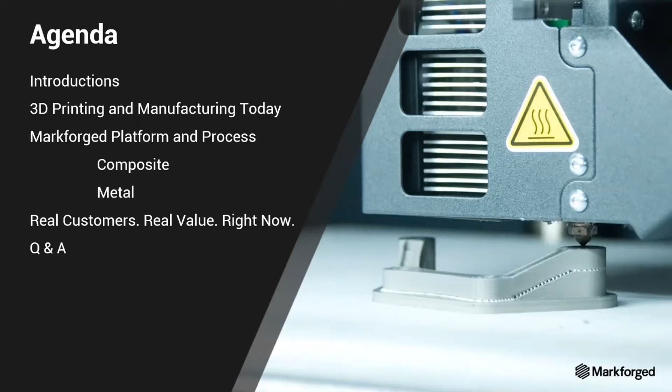But we also carry Markforged because we find that it augments the process of a lot of the machines that we sell and is an excellent additive system to get traditionally subtractive shops into the zone of additive, and it makes a nice transition to that. So the materials that it prints in are very strong, and the parts that it makes are very functional. So it works very well with the other technology that we sell.

So why am I here? I'm here to inform and educate you and give you some ideas on how you might integrate additive into your current process. The goal today is for you to leave this presentation with a better understanding of where additive is today and what you can start looking for in your own workspace that might be augmented by adding some additive to your shop. So let's just jump right in.

3D printing has a broad impact to manufacturing organizations, perhaps more than you're aware of today. I know years ago, 3D printing was more of a novelty. It was something that hobbyists invested in, not manufacturers, although manufacturers may have found marginal uses for the technology. It was not thought of as something that could replace or help a real serious manufacturer in any way. And that's not really the case anymore. Today, we'll explore beyond the tip of the iceberg and share a number of examples where customers are realizing major manufacturing efficiencies and transforming their business with Markforged.

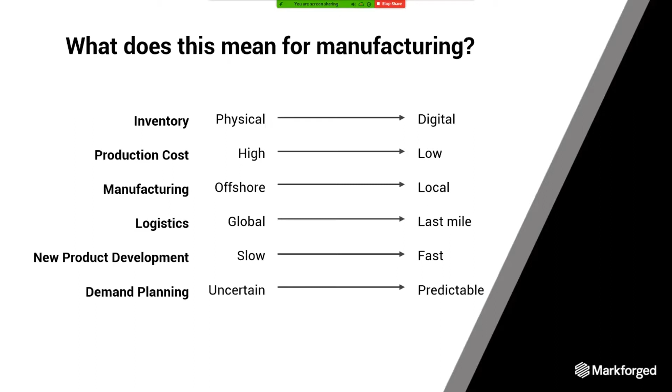And then demand planning, it goes from uncertain to predictable. You can look at what you're being requested to do and use your printer to help you with that. So don't just take our word for it, though.

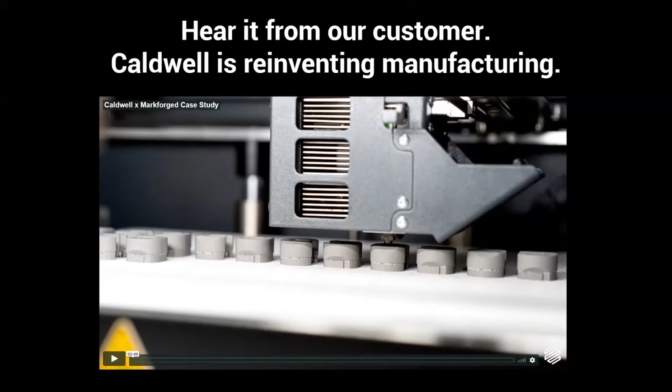I want to show you a video of one of Markforged's customers, Caldwell Engineering. They make window panes and fixtures, and they have integrated both the composite and the metal systems into their process, and it's revolutionized how they manufacture. So I'm going to play this video. It should work, I did test it before.

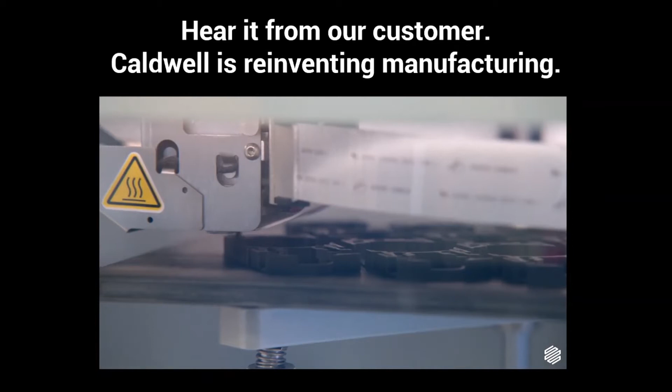At Caldwell, we make components that go into windows and doors that are sold around the world. We've used the Markforged printers to make everything from prototype all the way through low volume production pieces, tools, and fixtures to aid in manufacturing for assembly and/or test and measurement.

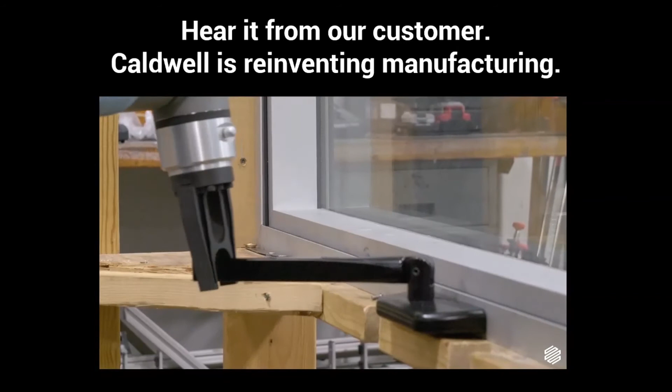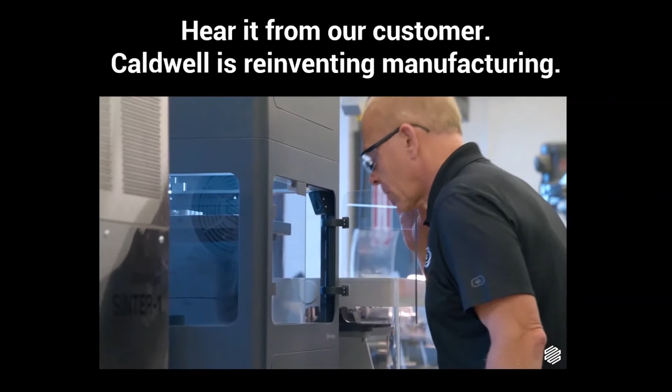In the past, an engineer would need a part made, and I'd have to estimate how long it would take to machine that part. Some of those parts could have 40 hours of machining in them. Today, with the Markforged printers, an engineer will give me a drawing, and the first thing that comes to my mind is I want to use the printers. This fixture to machine traditionally would probably cost 5 times as much and take 2 weeks to manufacture. I printed it in a day, and they were able to use it that same day.

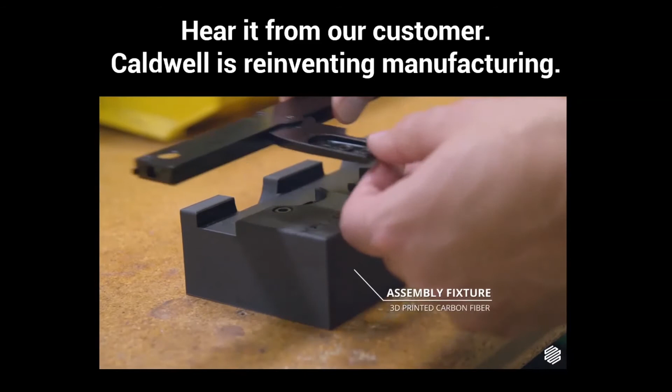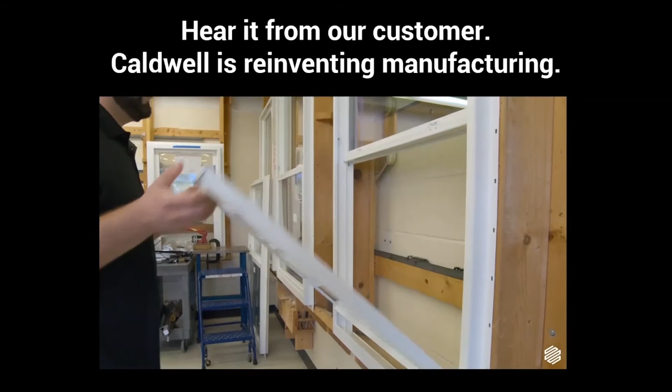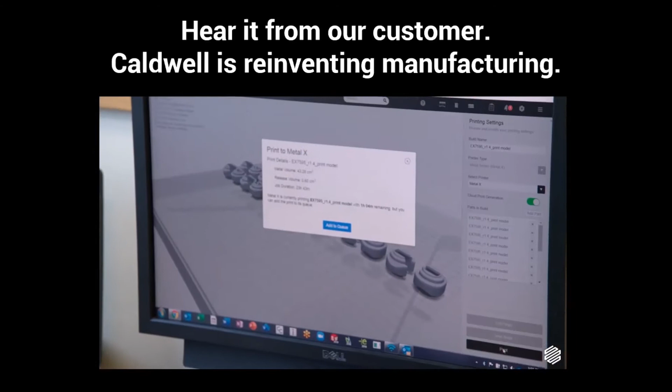This is a production assembly. This is a prototype assembly using both composite and metal 3D printers. This assembly allows you to tilt your windows in for cleaning. Having the ability to 3D print our own metal components has really improved our development process. The similarities between what we'll print in stainless steel and what we would cast in stainless steel is just incredible. That's something we can get in 2 days in our own lab.

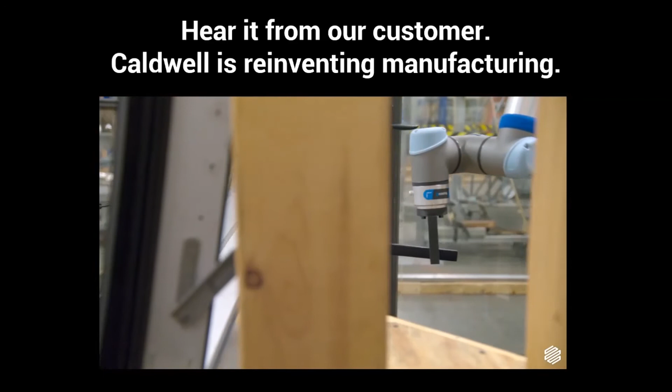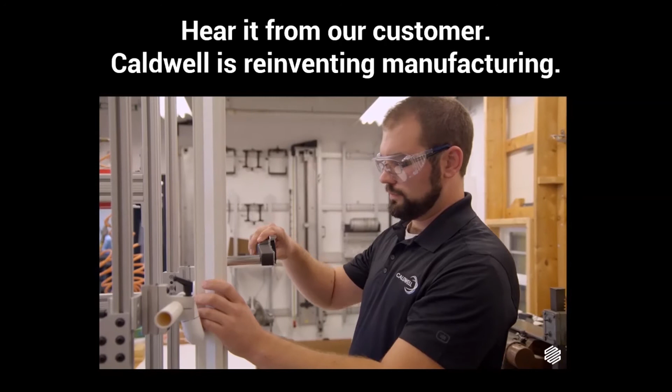The hardware we manufacture is what holds the window together structurally, and if that were to fail, it can mean severe damage to a building and major disruption for someone's life. The strength of the 3D printed parts that we get off the Markforged machines allow us to put those parts through the same set of conditions that we would test a production piece. They're real parts that have actual strength. In this highly competitive world, you need every advantage you can get to produce the parts, do your job, have a leg up on your competition in every single part of the business possible. And 3D printing is huge to help us do that.

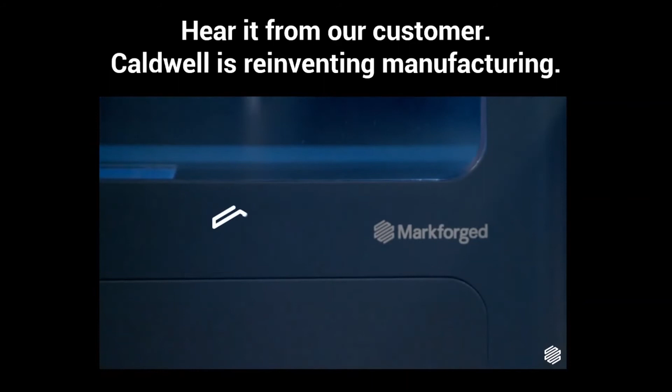Pretty cool, right? So you can see that it's really changed the way they do manufacturing. And we're going to revisit them a little bit later in the use cases section, talk maybe some more about the actual business impacts from a monetary standpoint.

So, okay, we've spoken broadly about where manufacturing is in regards to 3D printing. Now let's speak about Markforged itself. Markforged doesn't just offer a 3D printer, it offers a platform, which means it has competitive materials, a comprehensive portfolio of materials that are all made in-house, strength and accuracy to an industrial level.

So you're not going to be relying on hobbyist printers to do your work. Accessible and easy to use technology that is designed for manufacturers who may not have experience with additive, helps them integrate this technology into their current process with ease. They do a lot to make sure that the integration goes smoothly because they're aware that the technology is new. And that's a complaint with a lot of 3D technologies, that it is difficult to use and rather finicky, and you don't get precise, good results.

So Markforged does everything they can to try to mitigate that. And then as a company, they're also a leader in innovation. They've created multiple printing processes from scratch, and they're also developing software for manufacturing. One software that they're developing is called Blacksmith.

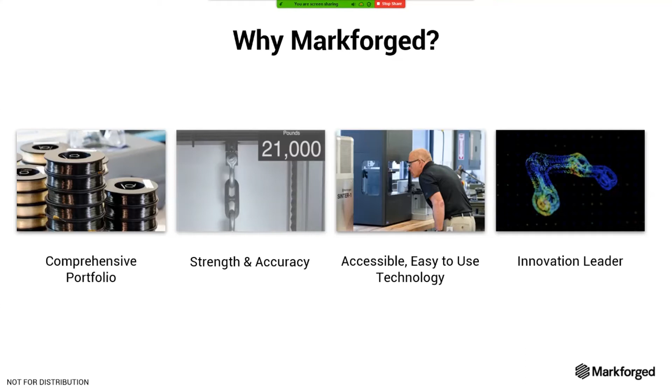If we break it down, the value added from Markforged is high quality hardware that does what it says precisely and accurately, that you can trust. Industrial grade materials made in the USA, designed for industrial applications, chemically resistant, strong, non-marring, that work for what you want your parts to do. And enterprise level software designed to make it easy to print from anywhere and manage users on your printers. The software is continually updated, so it's enterprise grade. It shouldn't be a hassle to work with. That's the goal.

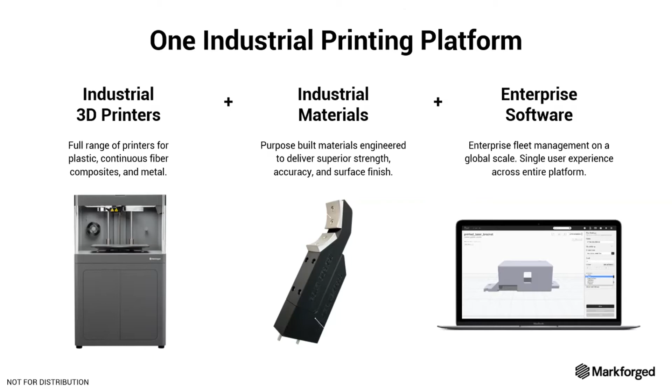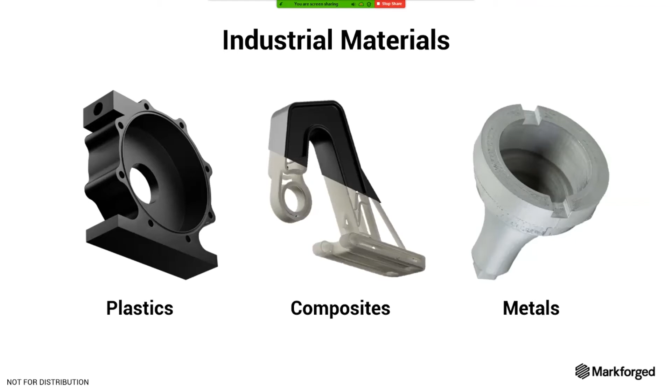Now speaking about the materials, they have a full range that stand up to industrial environments. Strong thermoplastics like Onyx, a nylon 6 carbon fiber blend designed to create great surface finish, strong parts, and chemically resistant parts. Only Markforged has the proven technology to reinforce with continuous fibers, which allows you to print parts that function like metal parts, replacing aluminum parts with ample strength. And then there's also metal printing. All materials are made in-house and are comparable to their machined counterparts.

If we put the technology together, you can do some really special things. This is a gripper arm used to lift a casting into a VMC. The company had to keep a lot of replacement parts on hand in case this machine went down. They switched to the Markforged system and are able to print these parts in a day or two instead of waiting two weeks on lead time, printed specifically for these pieces. There are metal contact points for wear resistance and higher stiffness and strength, and the arm itself is made of composites reinforced with carbon fiber, giving the same strength as the parts they were replacing at a much lower weight and cost. Using both technologies together produces amazing results.

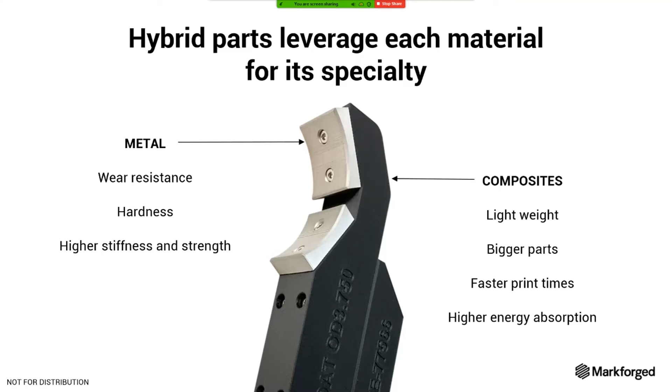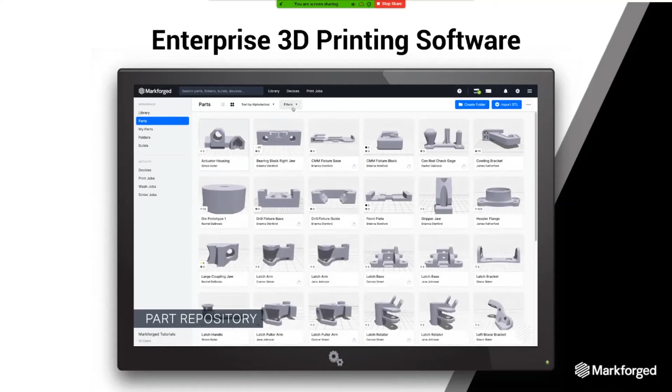Now speaking about the software, I'll let this video play so you can see what it looks like while I speak over it. It offers more than just a slicer - it's also a part repository with fleet management features. All your parts are stored within Eiger and can be accessed from any Google Chrome tab anywhere, even on your phone. It lets you view your parts in 3D and decide where to lay your fiber.

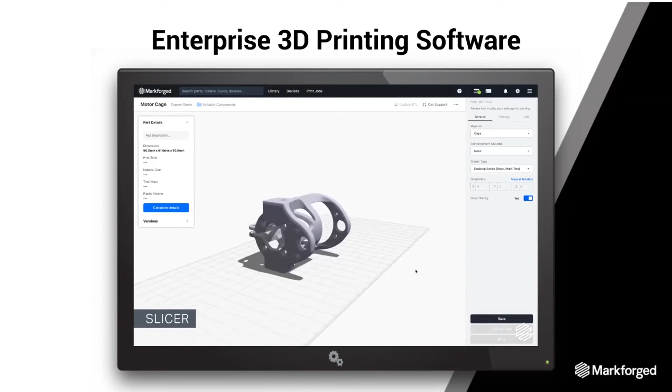It lets you change infills, wall, floor, and roof thickness. There's a lot of customization to your prints, and it's all cloud-based, so you don't have to use your own computer resources to do the slicing. It does it all for you, and you can print from anywhere - you can be at home, and as long as your printer is up, you can tell it to print, and it'll be there when you get in the morning.

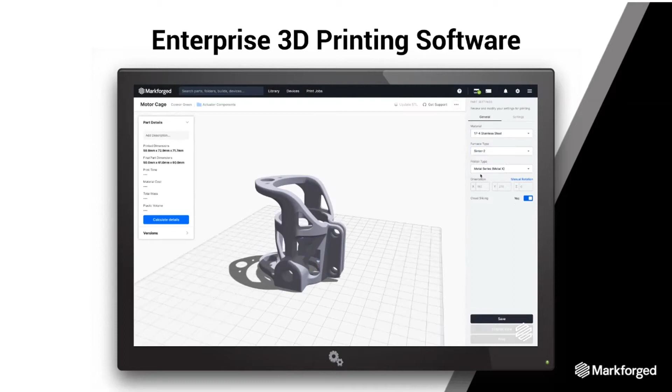The frustration of wonky slicers is sort of a thing of the past with this system, and I can speak from experience - this is a really easy to use software. So those worried about overcoming the software hurdles of doing additive shouldn't be worried. Eiger has you in mind and can fulfill your needs easily.

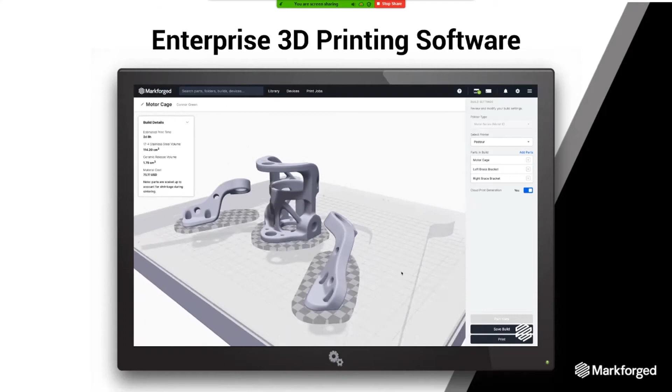So I've spoken about the platform itself. I'm going to dig a little bit deeper into the technologies, first composite, then metal, and talk about what makes them special.

Markforged is unique in that it's the only proven 3D printing technology that can print continuous carbon fiber. This is a complicated concept, so think of it like rebar in concrete. The continuous filament fabrication uses continuous fibers placed in the thermoplastic to deliver unmatched strength, so you can replace metal parts with parts directly off a 3D printer.

What that gives you is strength comparable to metal parts, and durability in a lot of different ways. It's variable depending on which fiber you put into your parts—you're able to change whether it's more impact resistant or lightweight strength. The process is optimized for performance, designed to be lightweight and great for manufacturers.

Breaking down the process, you start with your part in CAD, design it just like you would for machining, and then put it in the slicer. If I haven't explained what the slicer is, think of it like the equivalent of CAM for subtractive machines. CAM does the tool pathing—slicing takes your part, slices it into discrete layers, and paths the head around those layers so the printer can create the piece layer by layer, and then you print it.

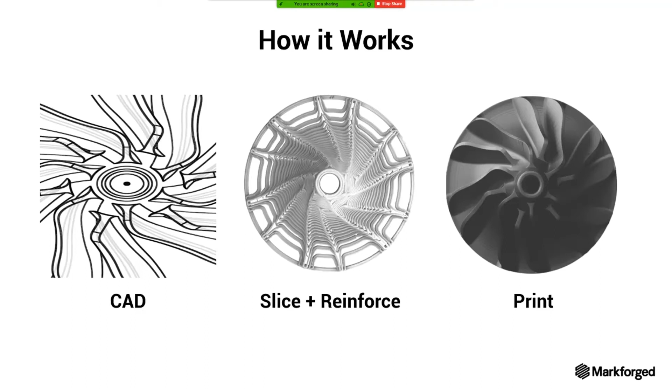In Eiger, you can alter how exactly your piece is made, altering slight attributes of it, including where the fiber is placed. With continuous fiber reinforcement, the part is plastic on the outside, and every other layer—or however you set it—it will print a layer of plastic, then a layer of fiber, then more plastic. So the part is inlaid with strong fiber, giving it a lot more strength than it would otherwise have as just normal plastic. That's what lets these pieces be so strong and good for functional applications.

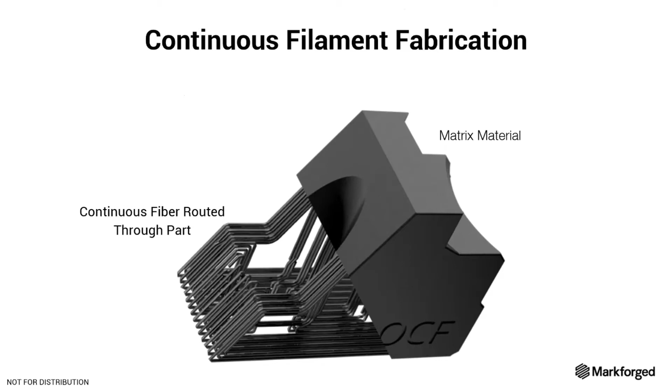Fiberglass is the most cost-effective fiber. Customers usually iterate on their designs with fiberglass and then print with carbon fiber later. Kevlar, like what you'd make a bulletproof vest out of, is highly impact resistant and won't break, and won't deform quite as much as some of the other materials. Lastly, we have high strength, high temperature fiberglass—like fiberglass, but it can endure more strength and raises the heat deflection temperature up to 150 degrees Celsius, about 300 degrees Fahrenheit. When combined with Onyx, you get a part that can withstand applied load at elevated temperatures for prolonged periods of time.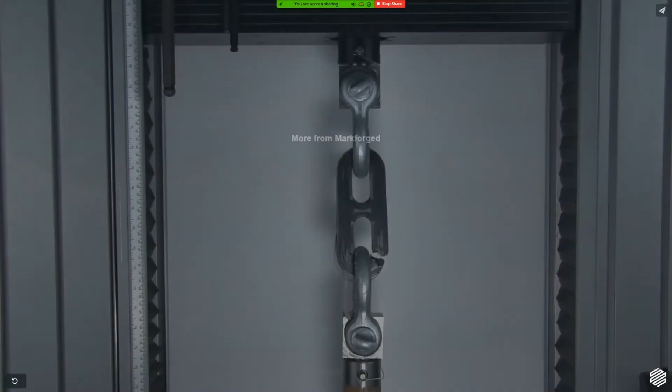So 22,000 pounds—that sounds like a lot. If you don't know how much that is, it's one unloaded cement truck, or six 2009 Ford Tauruses, or 19 grizzly bears, or 1.6 T-Rexes, or 1,500 bowling balls. So, a lot of weight. These are pretty strong parts.

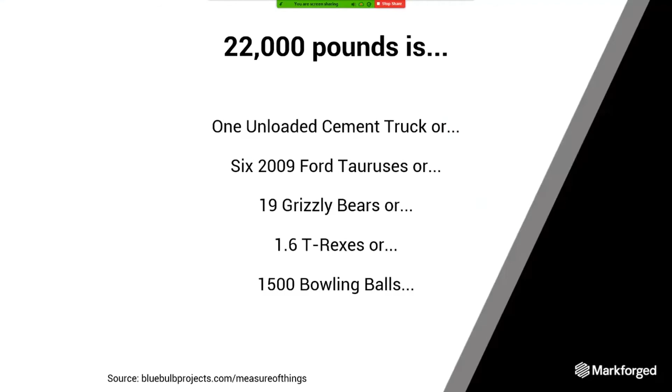All right, so that's enough for composite. Now we're going to move on to metal. I know some of you are interested mainly in that, so this part's for you.

The Metal X 3D printing platform is a safe, cost-effective, and easy-to-use system that dramatically reduces lead time and costs, and maximizes gains across your organization. It's safe, affordable, and easy.

For those of you who have investigated other metal 3D printing methods, you know that traditionally DMLS is the other option, and it is very expensive. Those machines cost upwards of $1 million. They require their own environments and operators, are very hard to change over, very power demanding, and require post-processing to even get the parts off the bed—you have to use an EDM machine to remove the parts from the bed. So although it is an option, it is often cost prohibitive and environmentally prohibitive for most customers.

That's why the Metal X was made. The Metal X is a fraction of the price and can offer similar results to these machines without all the environmental hazards.

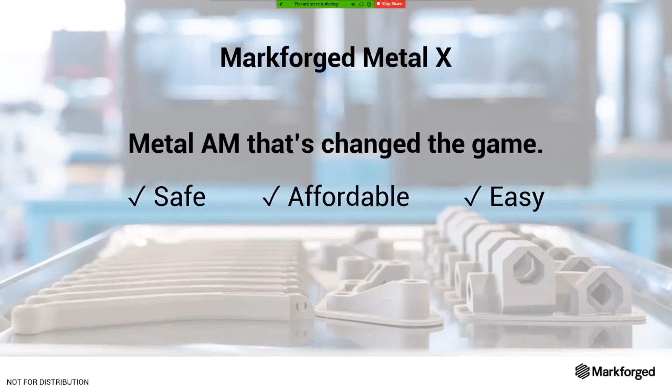Some of the benefits of the metal 3D printing process: no tooling. So if you have a part that you need made out of metal and you're worried about how you're going to position it in the machine, what tools you're going to use, or even the time it's going to take to configure everything, no problems. You simply put your file in Eiger, slice it, and print it.

It doesn't have any pre-setup required, so you have more freedom with the variety of parts you create. It's automated, so although most manufacturing processes require continual human oversight to ensure successful outcomes, this does not. All you have to do is put the piece in, and it prints it. You can print it overnight, come in the next day, and it's finished.

And then geometric freedom. We're constantly aware of the issues that traditional subtractive machines have with where your tools can go and how exactly you're going to create things. Some parts are just impossible to create with traditional subtractive methods. Those barriers are lifted with additive. It allows you more complex geometry and more freedom in your designs because you're not bound by the same constraints as before. This can add a lot of variety to your skill set or to your arsenal in what you can create.

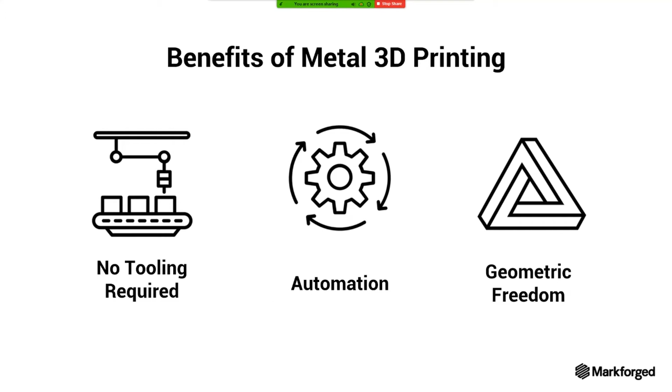So the process looks something like this. You print your piece. Once it's finished printing, it's what we call green. You take the green part and put it into this, what looks like a fryer, but it's the wash station. It uses an industrial degreaser to remove the wax from the parts, leaving them porous. So you have a part that is metal powder bound in plastic with porous holes.

You put it into the sintering oven. For those of you who aren't familiar, a sintering oven uses a combination of heat and pressure to cook parts. It compresses the parts, vaporizing the plastic and compressing all the metal together. So your parts do shrink, but it's uniform and the software compensates for it. You plug your piece into the software, it will compensate for any shrinkage it'll undergo in the sintering process, leaving you with your nominal values at the very end.

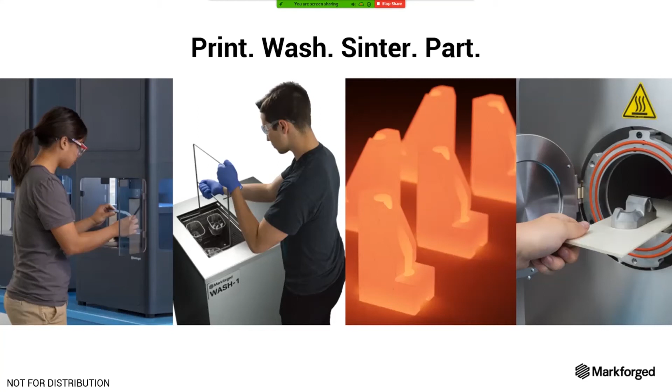Then you remove it from the sinter, and it can go off to any post-processing that you would do on a part made on a CNC machine. It can do heat treating or sanding or anything you might need to do to this part. You should be able to do it. It's not a special metal at that point, it's just what you get out of the billet. So if we want to watch the process itself...

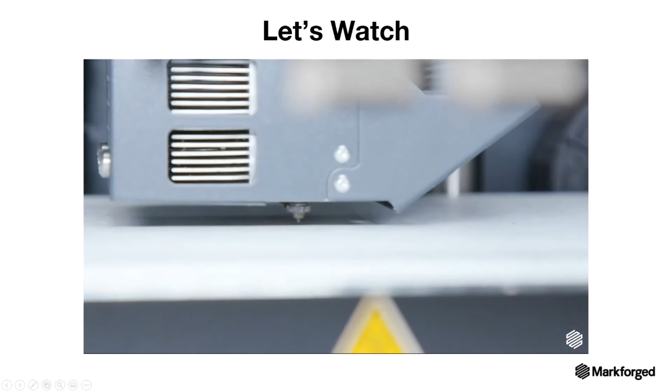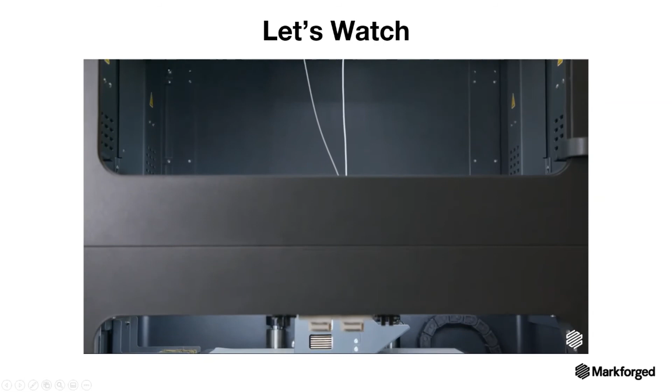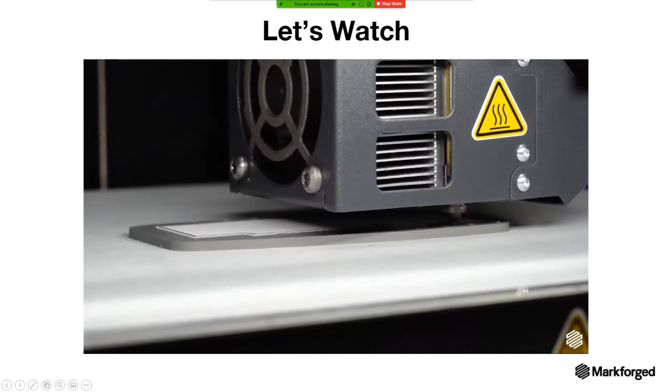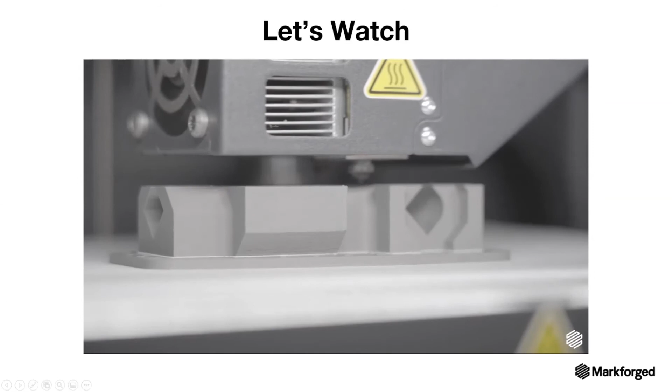Part comes out of the furnace, it's easy to remove. Unlike other metal 3D printing systems, this process does not require loose metal powder, resulting in a safer and more cost-efficient workflow. 17-4 stainless steel is loaded now. However, with a quick changeover, the system is capable of printing in stainless steels, tool steels, coppers, Inconel, along with several other materials currently in development.

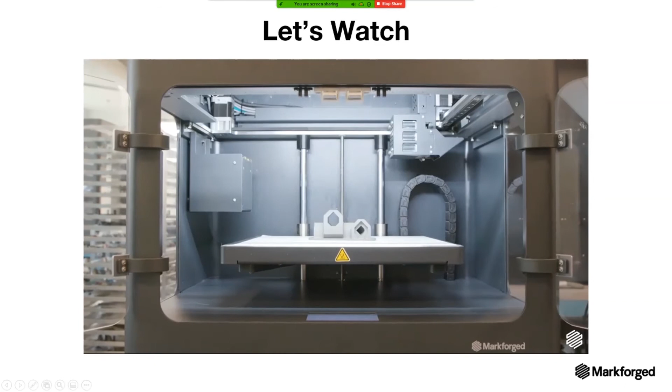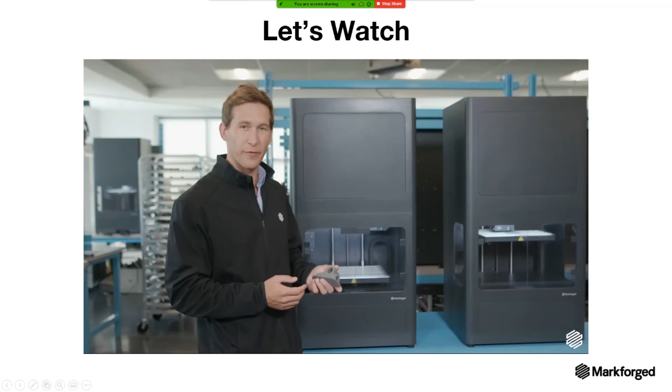Once your part is finished printing, you'll get a notification. At this point, you can go to the printer, remove the part from the build tray, and clear the bed. Now we have what's called a green part. It doesn't really look or feel like metal, however, a large part of it is comprised of metal powder. Next step will be putting it into wash 1 for the debind process.

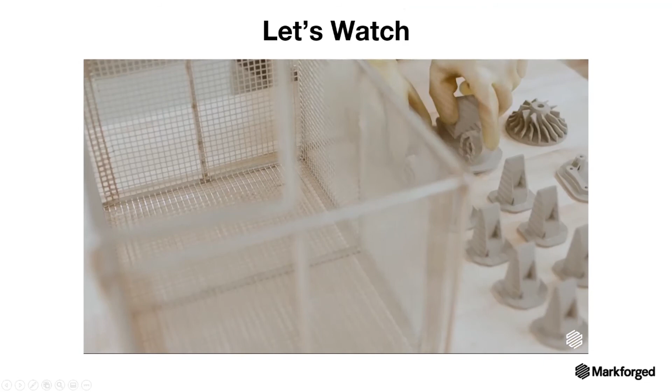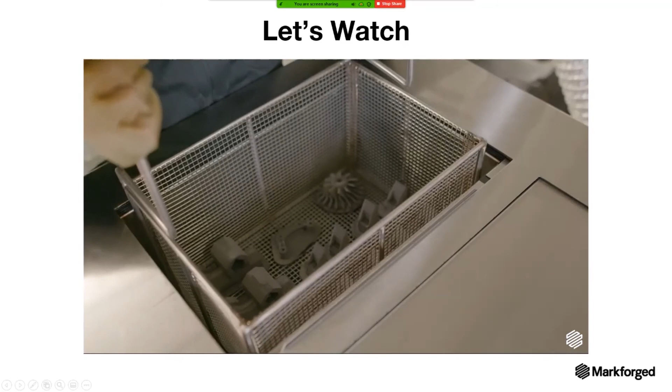The wash 1 removes the first stage of the binding material. A green part is taken from the printer and placed into the wash basket, which is then lowered into the solvent. Wash times will vary, ranging from a few hours to a few days, depending on the thickest region of your part. After that, it's now called a brown part and is ready for sintering.

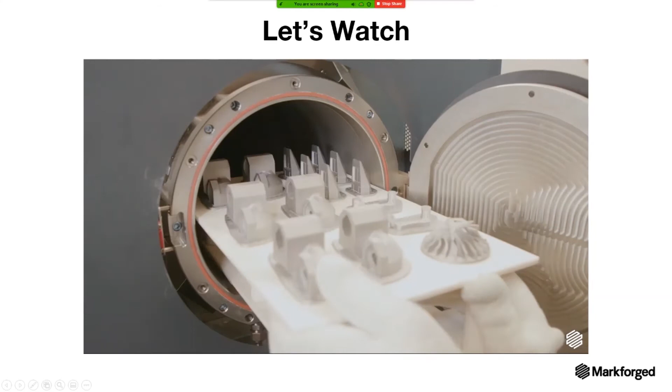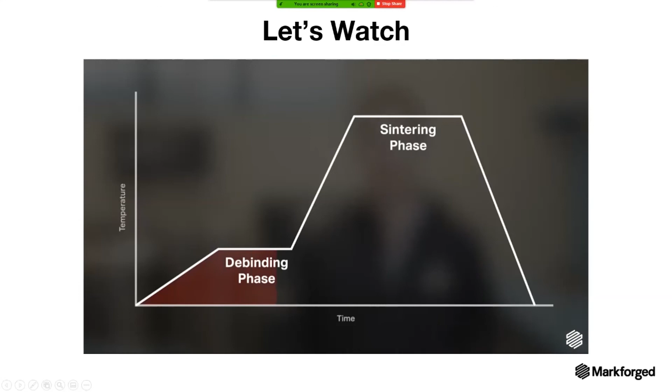Let's go over to the furnaces. This is Sinter 2, a furnace designed for mid-volume production runs and larger printed parts. Sintering transforms a print from a lightly bound collection of metal powder to a fully finished metal part. First, the temperature ramps slowly to burn away the trace amounts of remaining binding material. Then, temperature ramps closer to the melting point of the material, allowing metal particles to start to fuse together to create a strong metal part. Markforged sintering furnaces use a carbon-free retort to ensure part quality and alloy composition standards are met for our finished pieces.

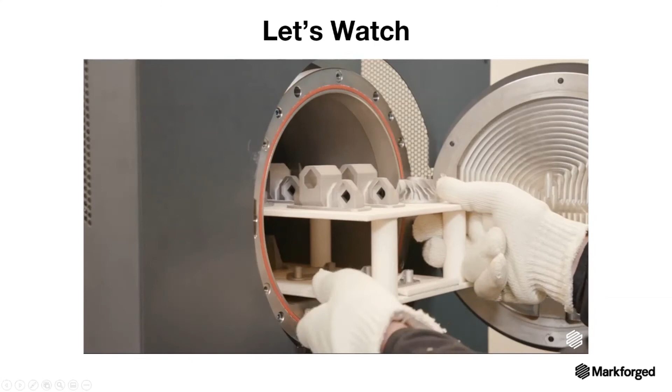Each run takes about a day and can be monitored remotely using the Eiger software. Once a run is complete, the setter tray full of finished metal pieces can be removed from the furnace. Once removed from the raft, these parts are ready for use.

In the furnace, the layer of printed release material between supports and the raft and your printed part remains powderized. This allows the structure to be tacked to the raft to better control shrink and accuracy throughout the process, but also allows for an easy release after sintering.

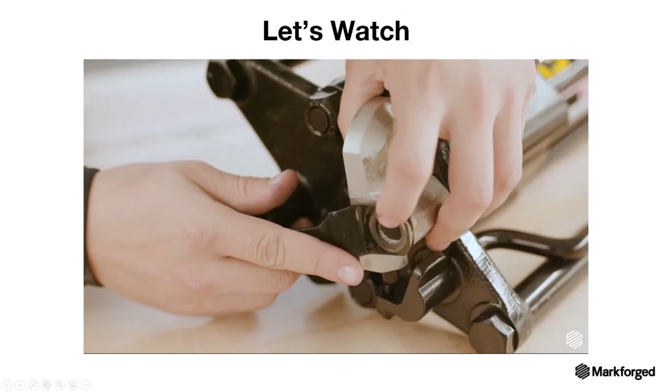At this stage, your part is fully sintered and ready to be used. It can be post-machined, polished, or otherwise processed as necessary for the final application, but in many uses, the accuracy and strength are good enough as is.

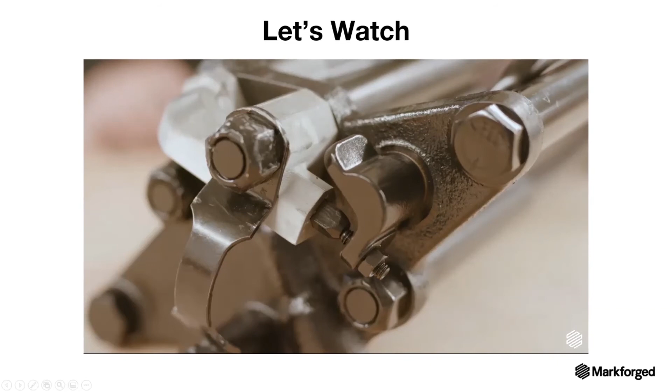You also have Inconel 625, which if you've ever tried to machine Inconel, you know it's very, very difficult. It's a very hard super alloy that is very good at taking changes in temperature. It can go up to 1,000 degrees Celsius without deformation. Great for furnace applications, and we'll speak about a customer that uses it very well later.

D2 and A2 tool steel, your standard stamping tool steels, very hard and both available in the Metal X. Then you have H13 tool steel, which is a high heat resistant tool steel.

And then copper - it's actually a recent release - but you can print any kind of heat sink you'd imagine, as well as EDM probes and welding probes. So copper, again, very difficult to machine, not a problem with the metal printing system. A great solution if you have to make things out of copper. You can also print coils, so if that's something your business does, you might want to look into this.

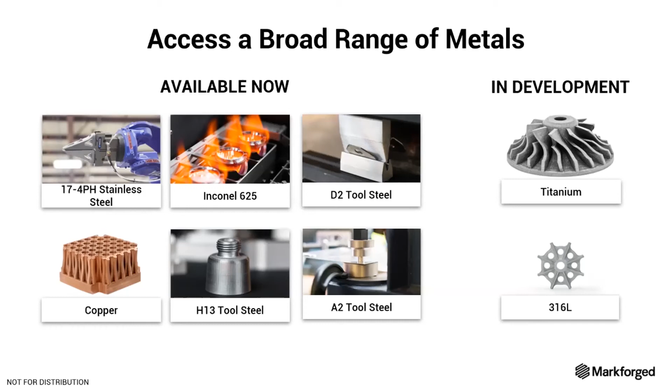Titanium and 316L are both in development, and I can say that Markforged doesn't release a product unless it works. So I've seen titanium parts and they look great, but they'll release it when it works on every system all the time. So that is coming down the pipe for you, stay tuned if that's your primary metal you're interested in.

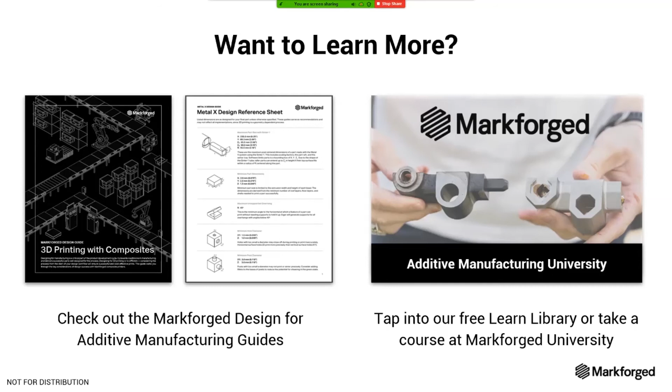Seems like I'm getting a question I'd like to answer now. It says, can you go into the importance of being able to change the materials in the metal printer? Yeah, so like I said before, in DMLS systems there is a build chamber that has metal powder in it. And as you know, metal powder can be very dangerous unless it's handled properly. On top of that, if you want to print a different material in that metal system, you have to change out the entire build chamber.

So the benefit to the Metal X is it's just a spool. All you have to do is load the material in and click which material you like, and you can put any of the 6 material spools into the Metal X. No tool changeovers, no nozzle changeovers. You simply tell it which material it's printing and it'll print it. So you can print Inconel, copper, and stainless steel all on the same machine with no changeovers.

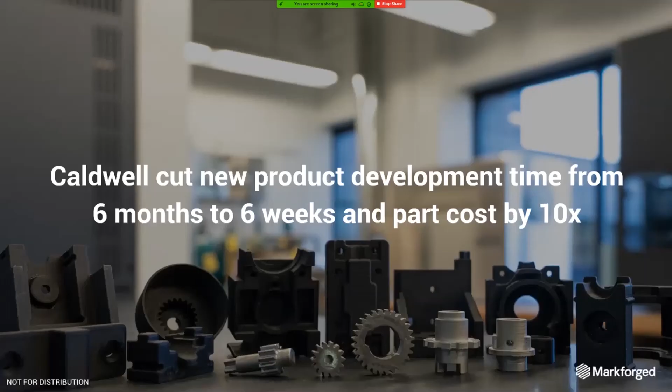So now I'm going to speak about some real-world customer examples of people who have integrated Markforged into their process and found a lot of use from it. So Caldwell, like we spoke about earlier, you can see down here all these parts that they've made for all their different window fittings. They're a family-owned operation that's been in business for over 130 years. They design over 100,000 SKUs, so they have a lot of variability in what they create. 3D printing is the first tool they go to in their toolbox since integrating it.

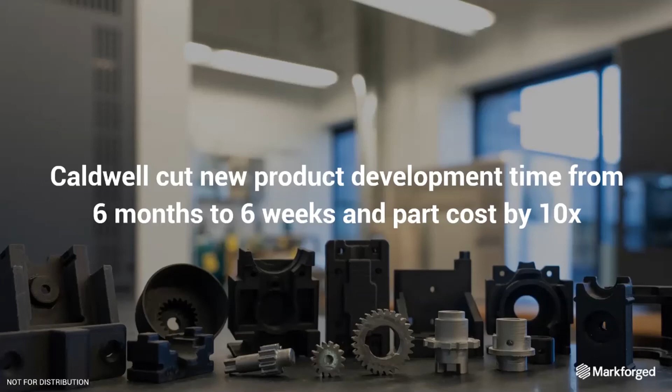They use printers for prototyping, fixturing, sales demos, and in-use parts. The business benefits are undeniable, and they're developing products faster and at a far lower cost. Something else I want to point out here is it's become part of their culture.

It frees you from some of the geometric constraints that traditional manufacturing methods have, and allows everyone in your organization to take advantage of it. Say you have an engineer that's really bright and has ideas on how you could do things differently, but he can't just take a machine off the line to prototype those ideas and experiment. 3D printing allows you to do that.

There's a much lower barrier to entry to innovation. So you can put this in the corner of your shop, and if an engineer has an idea of something that could improve your process, he now has the capability to act on that. It changes how everyone in your organization thinks.

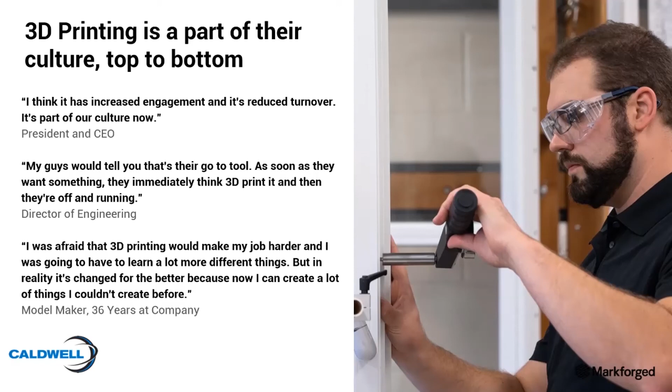Lean Machine is a Canada-based CNC fabrication shop. They have a composite printer and a metal printer that they use from one of their partners. The tooling costs and manual processes weighed down their ability to take on new jobs. So they built an automated sheet metal bending cell, and they can go from a signed PO to fabricating parts in 4 days instead of 4 weeks.

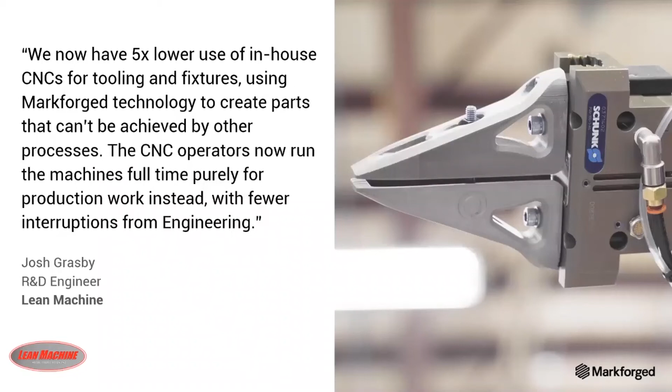The press brake tool and die were previously machined out of heavy steel, but with printed parts, they bend the aluminum wire clips with a better quality finish because Onyx is non-marring, so it's not going to scratch any of your materials. One of the other applications that they saw was end effectors for robot arms.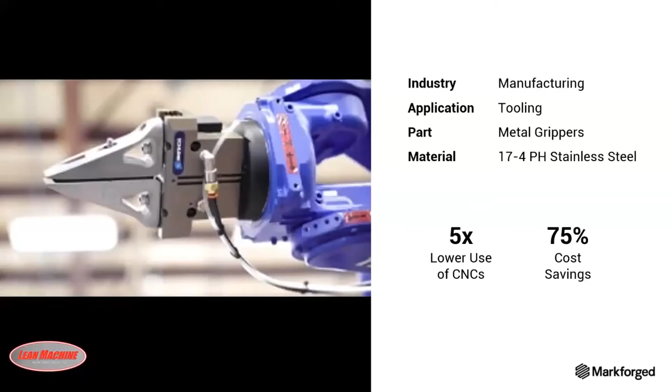They printed 17-4 grippers to be used by one of their robotic arms in the same sheet metal bending cell. Now they're utilizing their CNC machines 5 times less than before, and they think creatively about how to best design for additive. Overall, it led to a 5x reduction - they used their machines 5 times less, and it led to a 75% cost savings in their end product.

Another one would be Nieka Systems. They're a Canadian customer that manufactures mining and cement lab equipment. They design these crucible clips that hold the samples that they need to put in their furnace, and they need to be able to reach extreme temperatures and then cool down quickly to produce the final sample.

They previously outsourced the printing of Inconel 625 crucible clips, as the material can withstand temperatures of up to 1,000 degrees Celsius and then cool down without deforming. The high cost was getting to be too much, so they decided to bring in printing capabilities in-house.

You can see on the left is the Markforged printed part, and the right is the DMLS part. So they look very similar.

Insourcing also benefits businesses in a couple of other ways. Having the machine in-house allows them to rapidly design and test and print new parts. So it's a prototype machine that makes end-use parts. This results in better and more optimized designs.

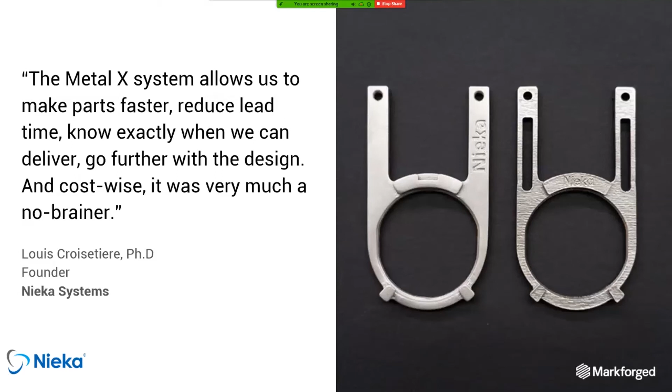Overall, once they brought their Metal X in-house, they reduced their lead time from weeks to days. And within a year of having the Metal X, the company paid for all of its machinery alone, paid for the printer and all the costs to run it. They were able to then get their products to customers at a faster and more affordable rate, saving about 86% of their lead time.

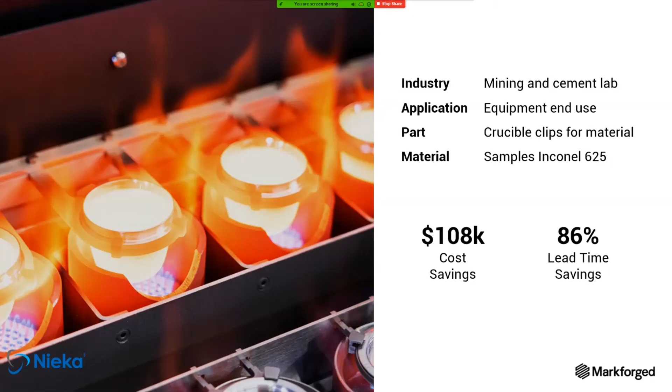Got a couple more for you. So Wärtsilä services a third of the world's largest cargo ships and oversees the manufacturing of large engines. Their Finnish and Italian factories often need to fabricate tools to solve problems and optimize the efficiency of both the field and the factories, and they usually have to rely on third-party suppliers to manufacture them.

They use their Markforged X7 printer to increase the efficiency and make quick design changes. So this is a lifting tool that you see here. They were already familiar with Markforged 3D printing, but they needed more throughput and capacity, which is why they upgraded from a desktop series to an industrial series with a much larger print bed.

One of their use cases for 3D printing is this lifting tool that you see here, which is used to move heavy components like engines. They needed to transform a heavy, hard to transport tool into a lightweight part that allowed the team to increase its efficiency. So here's a video of that tool working.

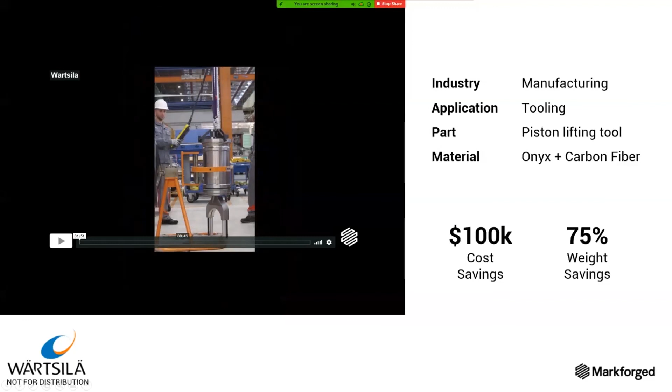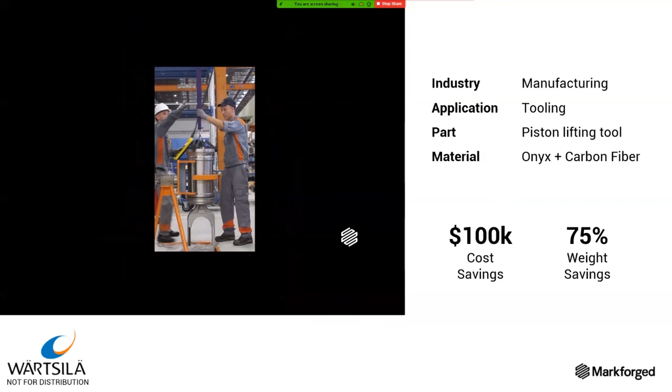By printing the tool instead of machining it, it lost a whopping 75% of its weight. The tool was actually awarded a CE certification, making it the world's first CE certified 3D printed lifting tool. The company saved not just money, but increased the efficiency of its operations.

They also purchased a Metal X printer and have found a lot of success in printing metal grippers. So like you see, here's a video of the tool in action.

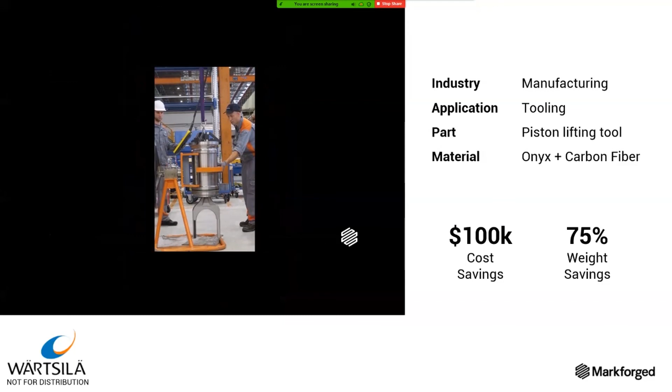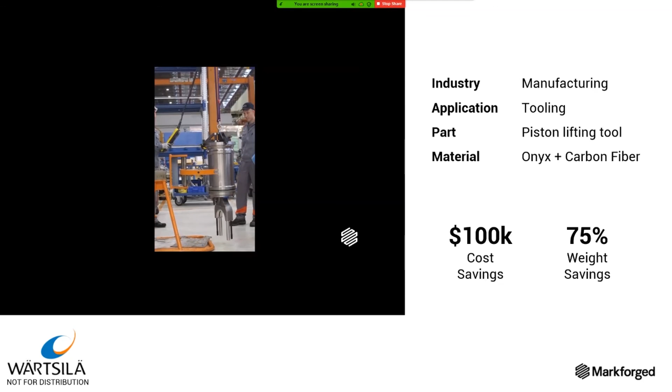And it's supporting all the weight of that very heavy engine piece. So now their tool weighs a lot less, so transporting it is a breeze. And they can also print these to be more conformal depending on what they're trying to lift. So it's a benefit overall.

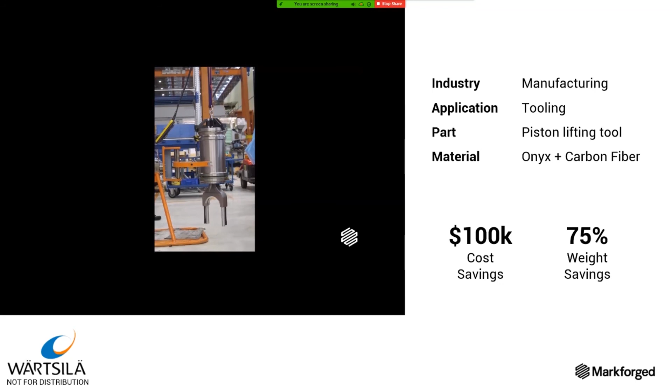Let's get past this part. And then finally we have Guhring UK. They're a Birmingham subsidiary, not this Birmingham, of the Guhring Group in Germany. They're a manufacturer of precision cutting tools for the likes of BMW, Jaguar, Land Rover, and Airbus, and they're very well known in the industry. They were searching for new business opportunities to serve their smaller customer base in the specialty tool space. By adopting metal 3D printing, they were able to open up new revenue streams for these high-value customers.

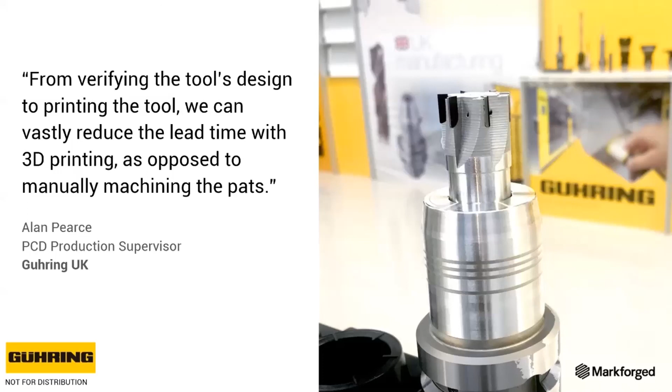So what you see here is a tool that they printed out of, I believe, H13. The general process for tools to be created included the designs needing to be approved by the customer before they go ahead and start making the tool. A process like this can take up to 8 weeks, so smaller customers have limited time to wait for a new special tool, and they're unlikely to have spare tools just sitting around. To open up new revenue streams for smaller companies who couldn't afford to wait that long, the team started looking into 3D printing.

I'll go ahead and start this video. They made it out of H13 on the Metal X printer, and initially it was just a simple prototype to prove out the design. After adding cutting tips, the tool was used as a reamer to cut some aluminum, and it worked just as planned. Now the company can provide low volume tools to their customers at a reduced price and have opened up new revenue streams for the business to service smaller customers.

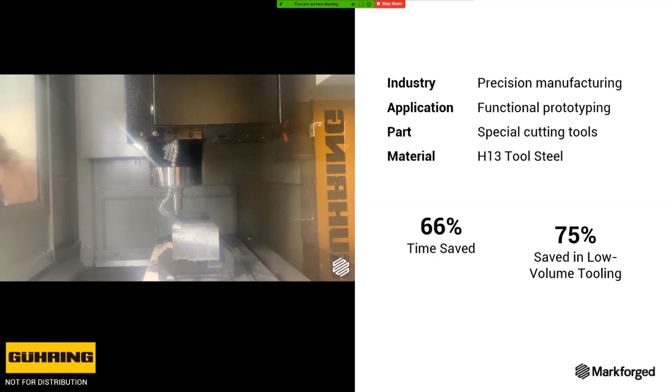So that's the end of the examples and my presentation.